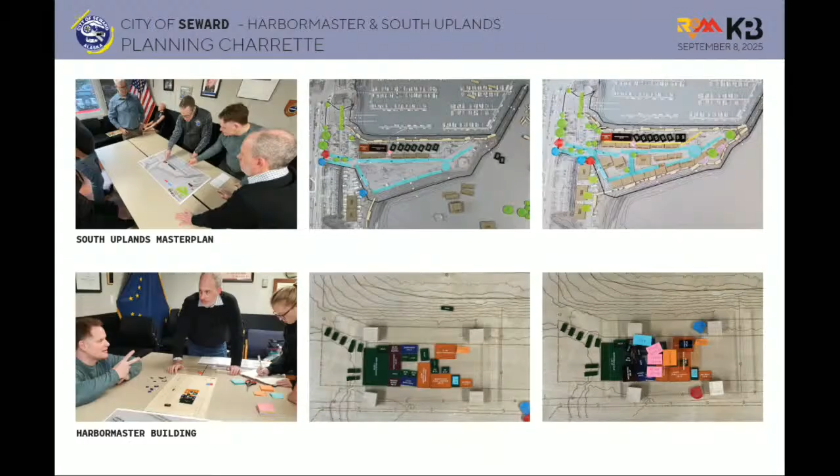So the first goal of playing the game was to come up with a new Harbor Master building that was going to meet the needs of the community, and specifically the Harbor Master staff. But secondly, to try to take that Uplands gravel lot and make it a place. Placemaking is a huge part of it, while still providing that really core need of parking.

We know that this is a really accessible, desirable place for people to park their RVs, their oversized boats. Ideally they're not doing storage—shouldn't be more than 24 hours. How long do people park there? 24-ish.

So we wanted to continue that really big need by providing parking, but again, make it more of a place and make it clear how and where you can park. If anyone's been out there on a really busy day, you know that it's a little bit of a free-for-all. The first person who parks there gets to decide how everyone else is going to park that day, for better or worse, and that can be a real issue for our emergency response folks, especially when it's a busy day and being able to access those floats in the event of an emergency is a really big priority.

So making sure that we're defining pedestrian and vehicular circulation on the site was really goal number two.

I think part of this is that it's such a great location visually, both for people who live here and for visitors, that we really wanted to create a space where people can go. There's the boardwalk now along the harbor, and we wanted to extend that onto the South Uplands and really make it a destination for people to hang out and get all around that whole end of the South Uplands, and then even back to the bike trail to the south. So we'll touch on that.

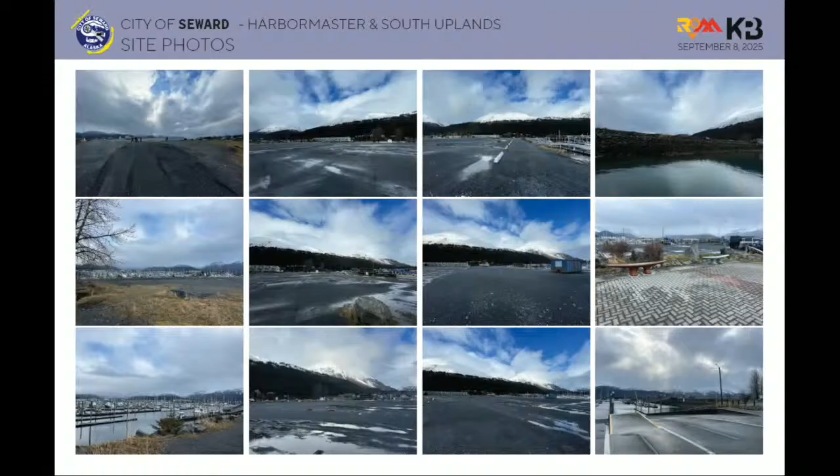I think the one other feature I'd be remiss not to mention is the Mariners Memorial that's already out there. It serves a very specific purpose, but it's also a recreational destination—people love to park their cars right next to it or walk and appreciate the views. The South Uplands really offers some of the best views of Resurrection Bay and the mountains all around. It's hard to find a bad view here in Seward, but this might top the list.

So from the game that we played—love that we call it the game, certain technicalities with that—we came up with a couple of different versions of a site plan that we reviewed with Jason and Tony and tweaked a couple of times to really try to meet all these goals. Again, the main one from a site planning perspective was making sure our circulation patterns make sense and we're still providing as much opportunity for people to park as we can. We know that's really important; we want to keep that going.

Before I talk about circulation, though, I want to point out the building locations we have here. You see the Harbor Master office is the rectangle with the blue label on the north end of the South Uplands, on the west side. So we're not changing anything in that existing paved parking lot.

We're putting it up on the gravel portion. If you're familiar with the site, there's kind of like a 4 to 6 foot grade change. We're proposing to put the building right at the end of that grade change and actually use that grade change to our advantage, and you'll talk about that in a little bit.

This would provide a view of the harbor, which is great, right from the corner, and also be able to see boats coming in around the breakwater as well. So we thought that this location was pretty advantageous, still being close enough to the transient float where it's accessible for people.

Coming off of all the floats to the north, we're trying to not make them walk all the way to the end of the South Uplands, so still maintaining accessibility there. And then the other big feature here is that other white box along the north side, which we have labeled as the lease area.

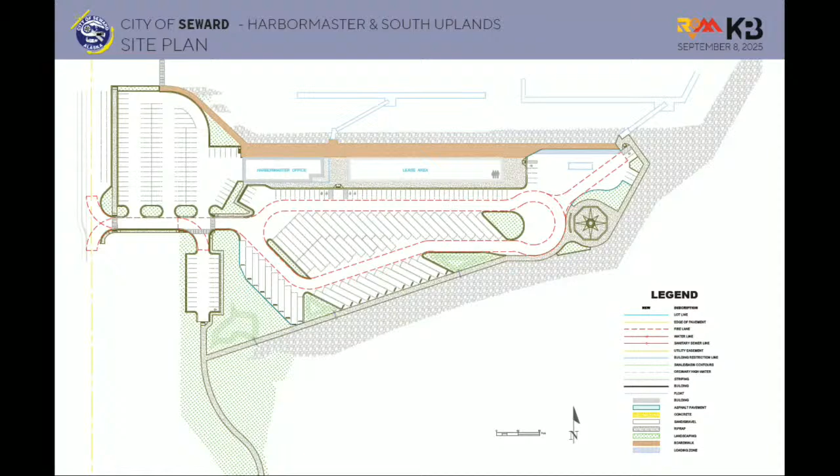Can I go to the next slide, please? Oh, that one, thank you. I know, we have so many versions.

We had one major constraint we decided on for cost savings and general planning purposes, to make sure we're setting our expectations for site planning in a reasonable space. There's existing water, sewer, and electrical lines already on the site. We didn't want to touch them, because we know that relocating water mains and sewer lines only drives costs up, so we kept those as our basic boundaries. We're not going to put a building over those lines, so that's what we're showing here.

The other important thing I want to point out is that the larger spaces along the southern portion of the uplands and in the center are all designed to be pulled through or back in. We did turning movements on all of those. There's a couple that'll take a pro to park, and we acknowledge that, but we didn't want to reduce that opportunity just because someone might be new at pulling a trailer, like me this summer trying to figure it out. I wouldn't park at the end, but I know my husband would.

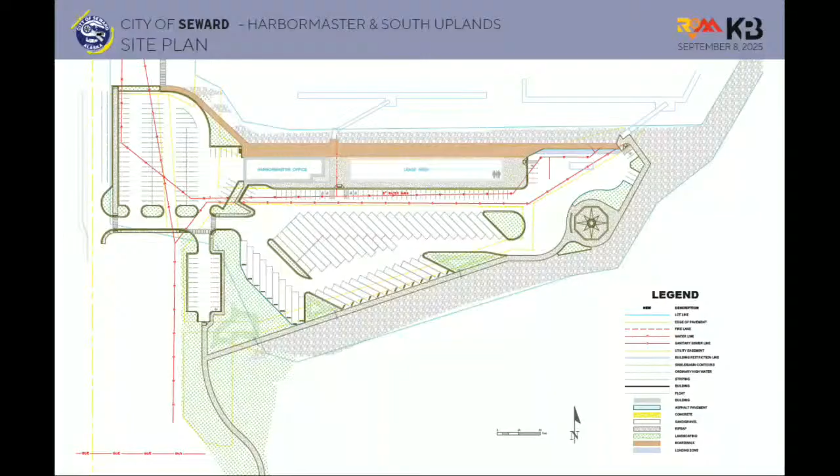They're all oversized stalls as well. A typical parking stall is only 9 feet wide, but these are all designed to be 12 and a half, so we can fit our extra wide trailers and people with their large RVs. They should all be able to fit there. We're also retaining standard stalls for personal and private vehicles up along the lease area at the Harbor Master building, again to try to encourage more year-round use, for people who want to come hang out for a while and have a place to go.

We thought pretty hard about where people might want to cross and how we can hopefully facilitate safer crossings, so there's a couple of crosswalks hatched in there. But the part I'm personally really excited about is the extension of the bike path from the south, going around the perimeter of the uplands, so you could walk or ride the entirety of it on a dedicated non-motorized facility.

If you're familiar, there's the pedestrian bridge just south of here that bookends either of the campgrounds, but there's no physical or visual wayfinding for that. If you're riding a bike from the south on the Waterfront Trail, it takes you towards 4th Avenue before you hit that pedestrian bridge, and unless you know you need to cut through the gravel parking lot at the campground, you won't hit that destination and you'll miss the South Uplands entirely.

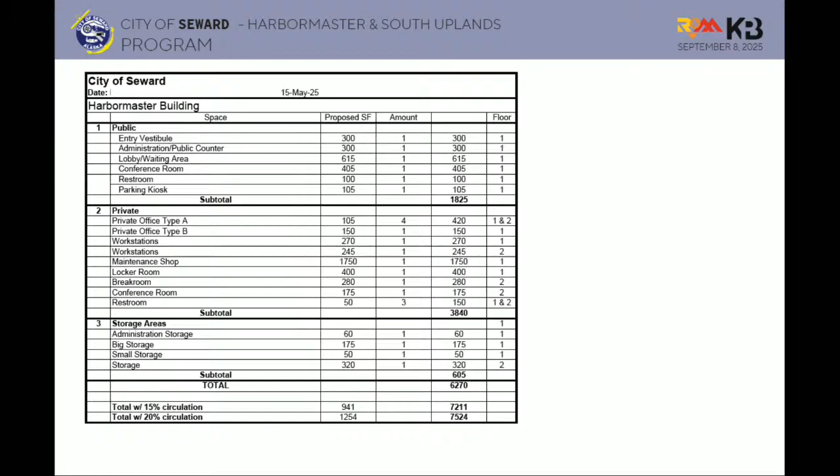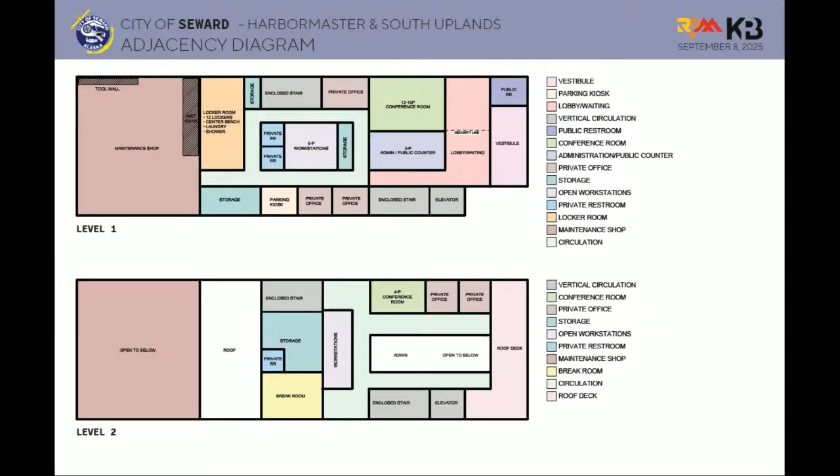Want me to take that one? Yeah, please. There will not be a public bathroom other than the small public bathroom for people visiting and to do business within the building, because we'll have that public bathroom further to the east. And the plan is to keep the public bathroom at our current location now, after this is in place, and then attack that area with an updated plan.

Okay, go ahead. Cool, if you can jump to the next slide, please. So what we did was, we wanted to, as part of our deliverable, really wanted to at least give a feel of what this project was.

And this is just a very, very high level concept massing of what the project could look like. The idea is to create something with lots of natural light, good views of the harbor, something that can fit into the environment, much like we looked at for fire, sort of maybe we're setting a tone for civic buildings in Seward.

And that's one of the other things we had here as well. So we took some of the shapes or forms that we did on fire and translated them over here. But again, trying to do big windows to frame views for Tony and his team, kind of trying to set the garage element a little low in that transition, which you kind of see right in the middle of the screen, and creating some secure parking zones for the harbor master staff that could be a little bit behind landscape and not in the main public zone.

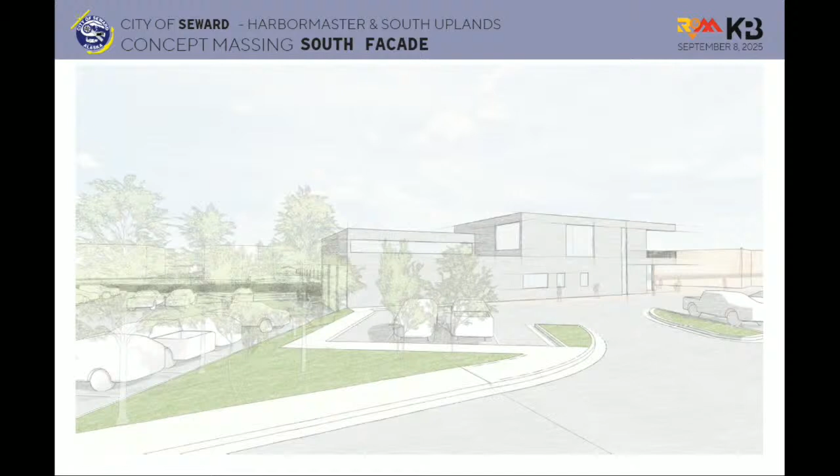On the boardwalk side, creating a building that had a lot of natural light getting into both the space on the second floor, creating this really cool rooftop deck for the harbor master team to be able to see everything that's going on. And then on the first floor, creating transparency into the lobby as well as transparency into that shared public conference room space. Again, this is very high level, and that's sort of the next step that we can go.

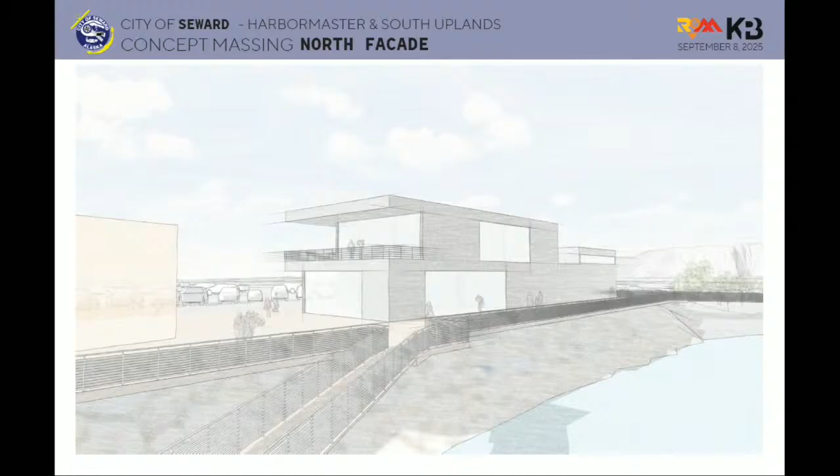Jump into the next slide, please. So as we started digging into this with the team a bit, we brought this big board down and we were kind of playing with different thought starters of looks and feels of projects.

The images on the top are a couple that sort of jump to the high level that people liked. And a lot of this had to do with spaces that could be activated in all seasons, spaces that are very public-facing, that could be integrated with whether it's boardwalks or other harbors themselves.

Even the opportunity, like the one on the left, which is a retail establishment, but really the first floor of this facility really is a retail establishment. It has to be in front, it has to be very accessible, very clear signage. So that was sort of an important piece of it, is that you want it to be welcoming and warm, and people to know, here's where I go to deal with stuff. So that's sort of some of those key features that you see on the listing on the side there.

And then the other piece that really started to float up was how is this whole boardwalk concept and the bike trail that surrounds the whole South Uplands. That was a really important piece that we wanted to focus on.

So the image on the bottom right is an idea of how do you create this boardwalk or bike path that goes around the whole thing, and we integrate what we'll call like stadium seating, an idea that kind of goes down almost to the water.

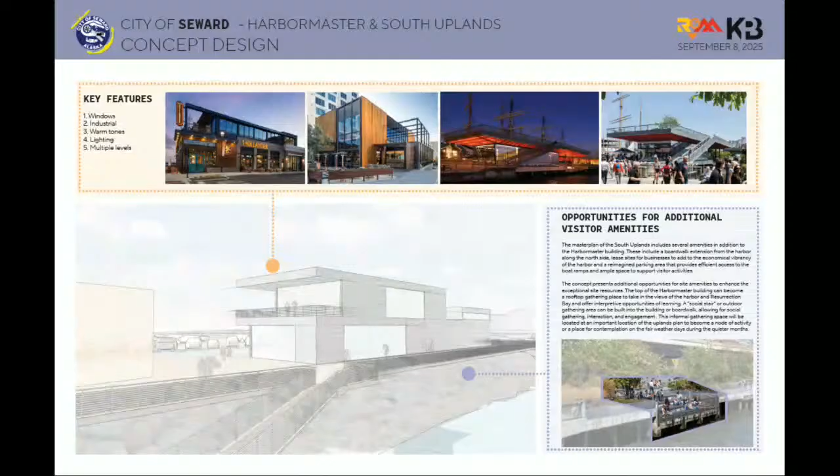Our task with the whole team was to basically come up with the package in front of you, a high-level concept package that takes the project to show that it's viable, how it can really work, create a program, look at all the needs for the facility, and get it to a point where we now need to present what it takes to get to a shovel-ready project.

So Jason and the team asked us to put together design fees for the project. We broke it down into four deliverables or milestones: 35% schematic design, 65% design development, and then 100% construction documents, which is basically a permit-ready, shovel-ready project.

One thing we talked about when I was down here in February is potentially looking at an alternate delivery method. We're seeing with tariffs and everything going on in the world that a lot of projects are going what's called an alternate delivery process, where we bring a contractor on early in design, not through bid. I'm not sure what your procurement process is, but it's something to think about.

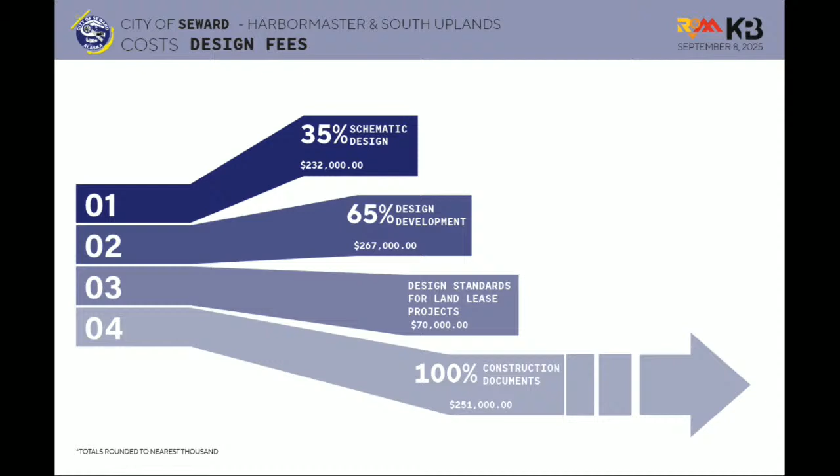I'm just going to warn you, it's 6:45 and we're going to want to end within 10 minutes. Okay, I'll go to the uncomfortable stuff really quick - it's our last slide. Thank you for the time.

What the team asked us to do is put together a very high-level project cost. When I mean project cost, that's everything - all the design fees, all the permitting, all the FF&E, everything down to the chairs, any other contingencies. This is sort of where we landed. We took a conservative approach because we didn't have a cost estimator on the project yet, so we used some numbers we had looked at for both the police department and fire department as a baseline. Seemed like a good starting point, and we used those to create this budget for the project.

Yeah, so after that, any questions? I did want to make one more thing that we're working on that I wanted to point out - we actually put a parking kiosk involved in this building as well. Parks and Rec will have their own little office in there, so that way they can help out with parking in the area, because it seems like a really great spot for it. So that's sort of where we're at. Any questions? Questions from council?

We've got a couple minutes if anyone out there wants to comment or ask a question. Could you read the bottom line number? We can't see it. Sure, your total project cost - go ahead, read it. $13,949,252, just under. Say it. Just under 14 million, right.

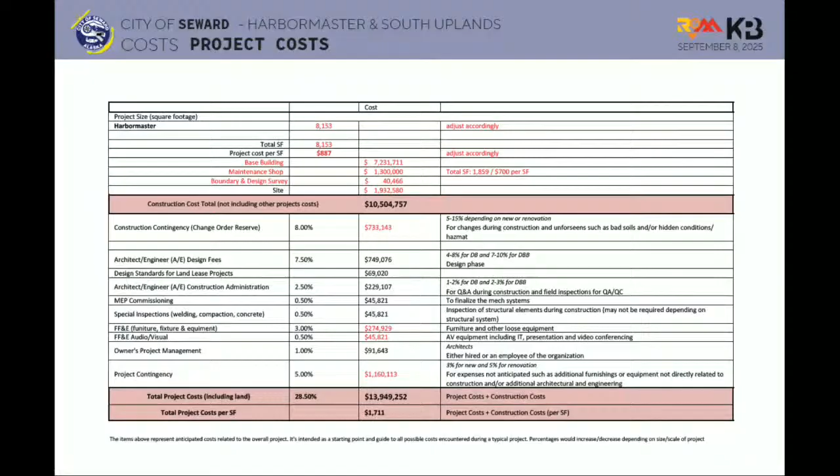I did have one question. There's electrical utility through there - is that part of this project, or would that be dealt with beforehand, or what? We know where it is and we're proposing not to relocate it, so we're going to work with it where it is. Are you talking about expanding that, or? No, I'm talking about solving the problem - it's been a problem for development for years. So we're going to develop around it and utilize the current existing lines rather than building and moving them, as a cost saving. Thanks, Bruce.

Anybody else? Yeah, go ahead. If you give your name too, just so we can hear. Yeah, Mike Taylor, I live within city limits. I had a question, actually I had a couple. With the harbor master's office moving to the new location, will there be any exploration of maybe expanding the amenities of the old office, like bigger showers, maybe a laundry area for the visiting small vessels?

That is the end goal, is to increase that footprint - more showers, more bathrooms, maybe a potential site for people to gather and wait for a bus, a covered bus stop if you will, and change that whole look and feel to a safer passenger flow and better experience for our visitors and locals alike in that area. It's a little scary at 6 o'clock. I think we can all agree on that.

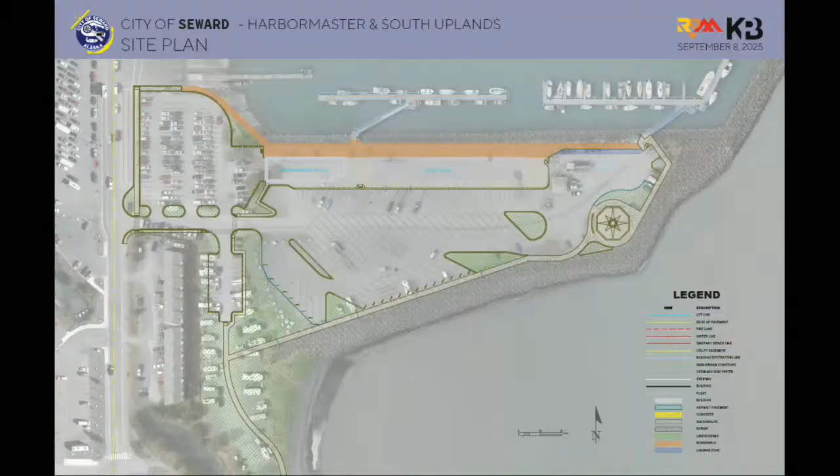I got one more. Okay, Bruce. Will the final design be juried? I mean, you've got this modern-esque thing there, it could be Tudor, Mediterranean, whatever - how will the final design be decided? We would bring it back to council for final approval before we do any building, so you can make sure you're in there. Okay, thank you - a design would be good.

Any last - I would say one thing too that's discussed that we got shown in the picture, but I wanted to make note of it. One of the things we're looking at is having something that does have a flat roof, because for an evacuation area down in the harbor, should there ever be a tsunami, it's something they are building into certain buildings. So that's why we're possibly looking at that flat roof area, to go onto the roof during a tsunami - it's a local gathering area, but they are building those in different places in tsunami zones.

Anything else? Well, this was a lot of information from Tony and from you guys, and thank you. I think this is all on YouTube, so people can watch if they weren't here. And we can attach the presentation as well on YouTube so that you can see the details up close. That'd be perfect, then you can see all this stuff.